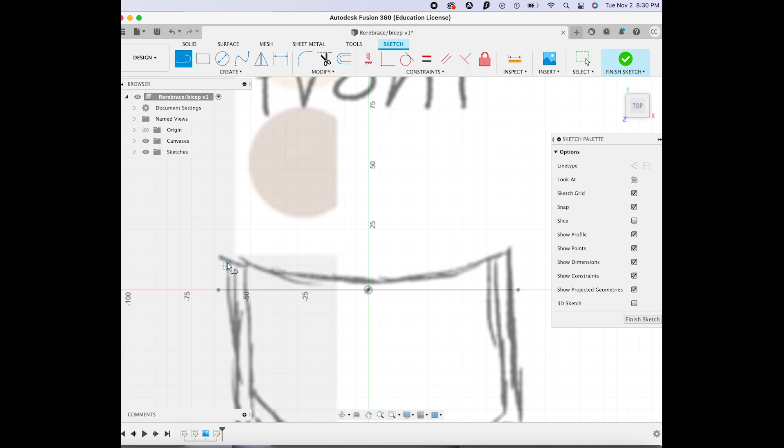First you're going to want to start out with inserting your chosen sketch image, and then from there you scale it up to the proper size that you want. I use guidelines like these two black lines on the screen, and those are just the measurements that I want to use, and that helps me to scale the image up properly so that I know I'm getting the right measurements.

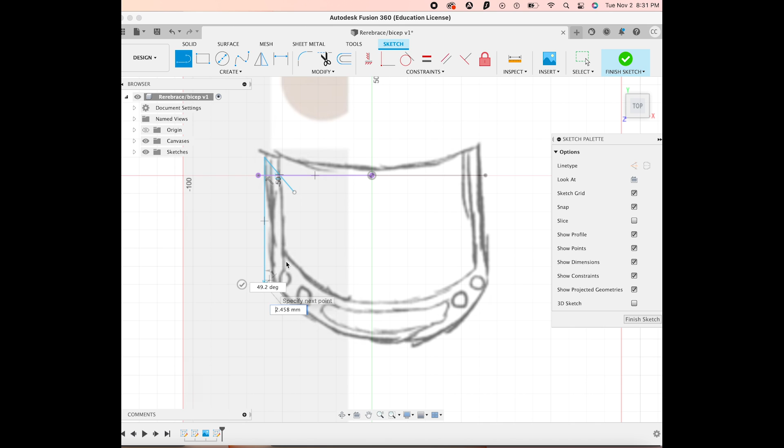And for this particular piece, I'm going to be using the line tool, the 3-point arc tool, and the circle tools.

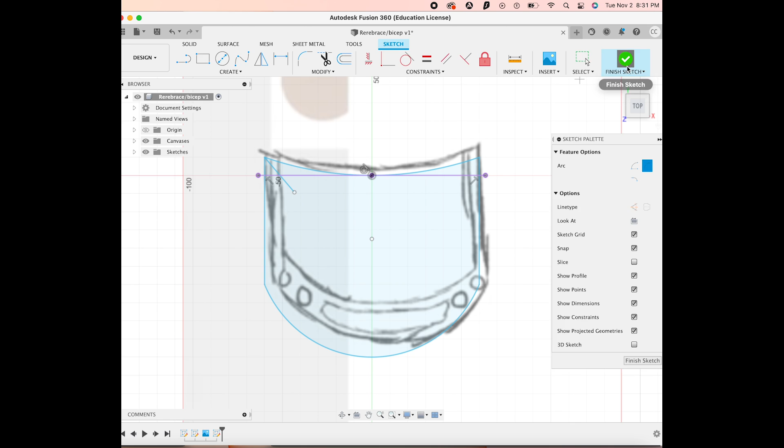For the 3-point arc tool, which I'm using right now, it's basically that, a 3-point arc, where the first one is where the selection starts, the second one is where the selection ends, and then the third point determines the angle of the curvature.

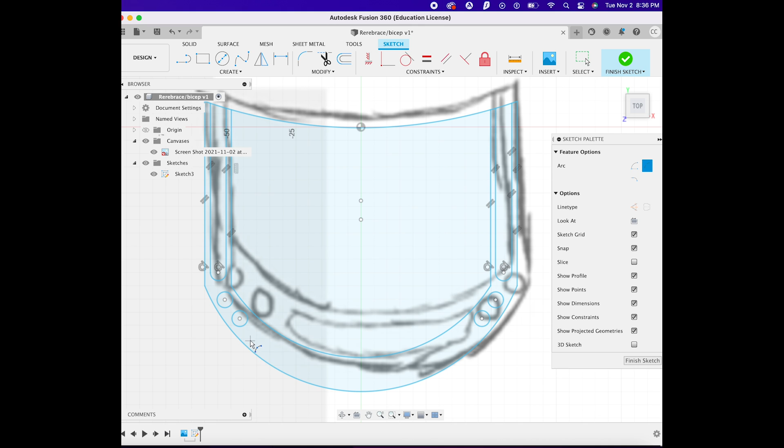Now that we have the 2D modeled sketch done in the 3D modeling software, we're going to want to go up to the Create menu and click Cylinder.

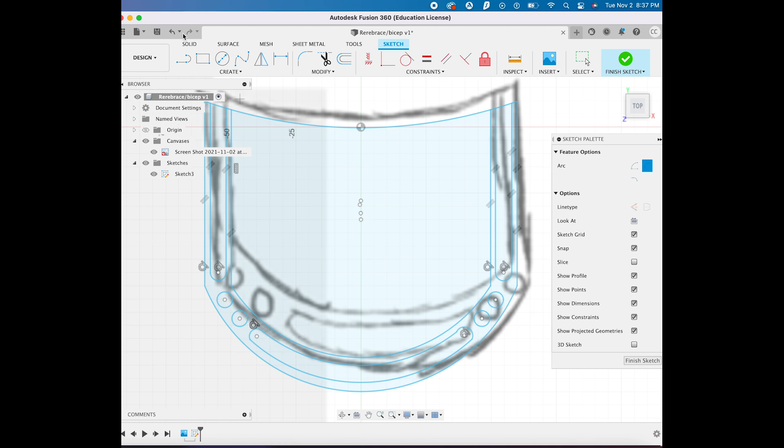For other pieces of armor, this selection could be different, but for the ones I'm doing right now, they're going to be for a cylinder. You're going to want to make sure that the entire cylinder covers the sketch, because if it does not, the extrusion is not going to work correctly or even work at all.

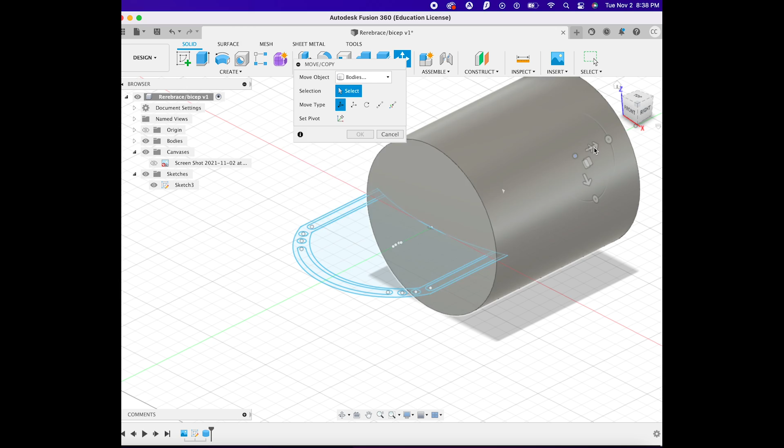This cylinder looks a little small, so I'm going to be scaling it up just a bit so that I can clearly see where the line of the cylinder ends and where the lines of the actual armor end, so that I know the extrusion will work correctly.

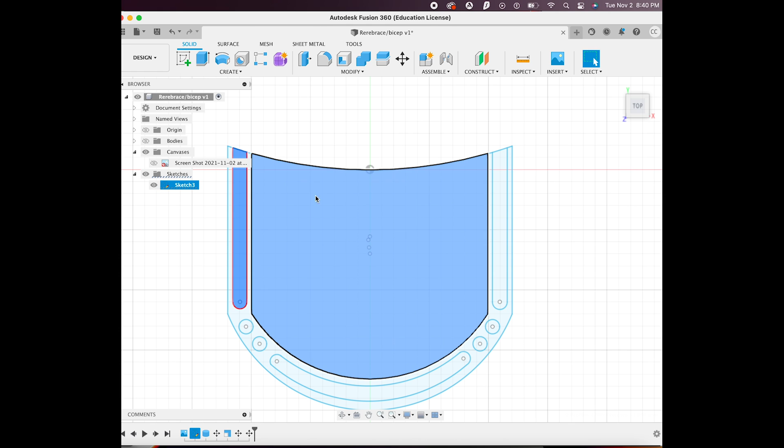Once you have your extrusion object all figured out, we're going to go into the sketch once more, and we're going to select the different parts that are all going to be the same exact width. You can do this by clicking Shift on a Mac - I'm not 100% sure what that would be on a PC or a tablet.

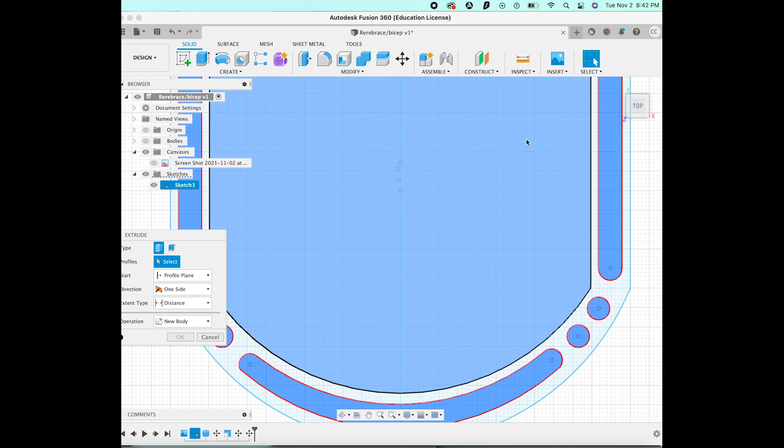Once you have those selected, you're going to hit E for extrude, and that will open up a menu that has multiple different personalizations you can do.

For the start selection, it's originally set as a profile plane. You want to change that to the selected object, so you're going to want to hit object, and then it's going to ask you to select whichever object you want to use for the extrusion. In this case, you'll select the cylinder.

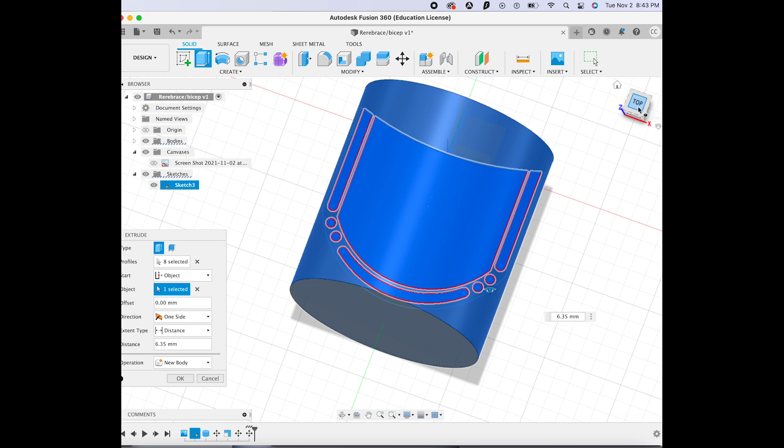For the direction, you just want one side. For extent type, you just want distance. For the distance itself, that is completely up to you - that all depends on how thick you want these pieces to be. And lastly, for operation, you want it set to new body.

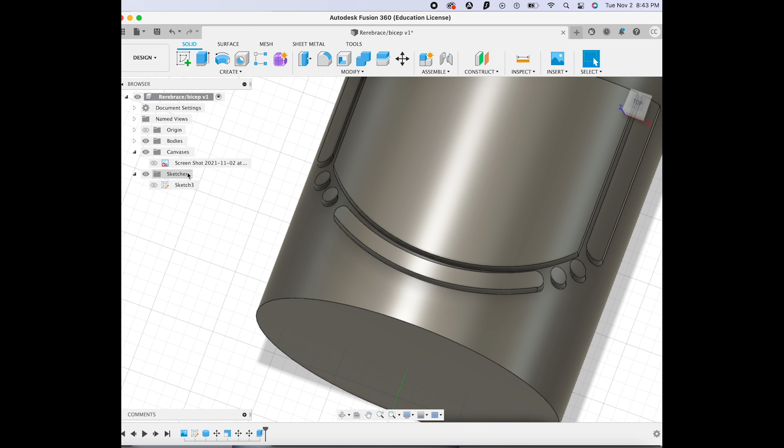Once all that extrusion from the cylinder is done to your liking, that brings us to the end of the tutorial. Leave any questions or comments below. I hope you guys have a great day.